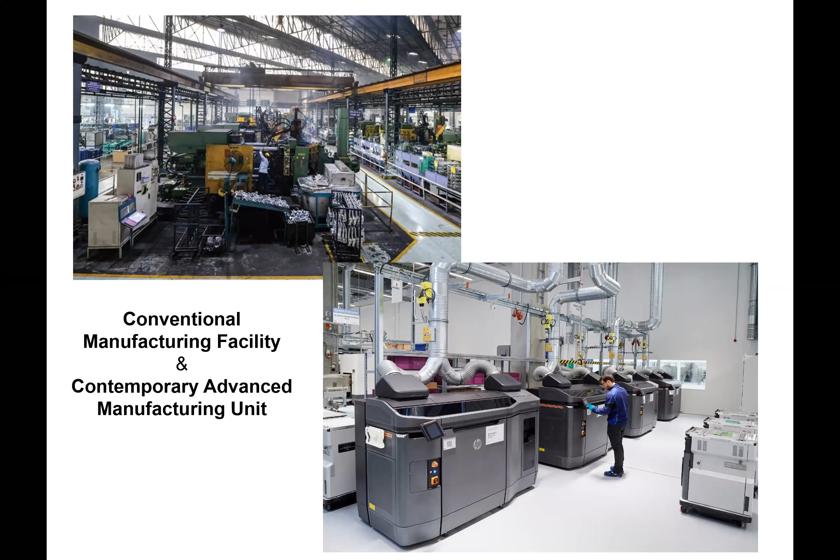And if you contrast the scenario prevalent in a conventional manufacturing setup, which I have shown on the top left, to what is being seen in this kind of instance, the changes are significant. The transformation is radical. So fundamentally, if you are talking about additive manufacturing, what happens in this case is the CAD data is converted into a physical model.

This is done layer by layer, by adding the material without any human intervention. Contrast this with conventional manufacturing, schematically shown on the top left, where you have to make use of tools, keep removing material depending upon the part geometry. The process may change, and the fixturing plan may change, and throughout the process you are generating significant amounts of waste. There may be manual intervention in some cases, depending upon the necessity to use tooling, fixturing, and inspection, which could be intermediate inspection or final inspection.

So contrary to that, in case of additive manufacturing, you are adding the material, and the process remains unaffected even if the geometry is extremely intricate. The systems can run continuously without any manual intervention. And last but not the least, the kind of materials getting integrated into 3D printing systems are continuously on the rise.

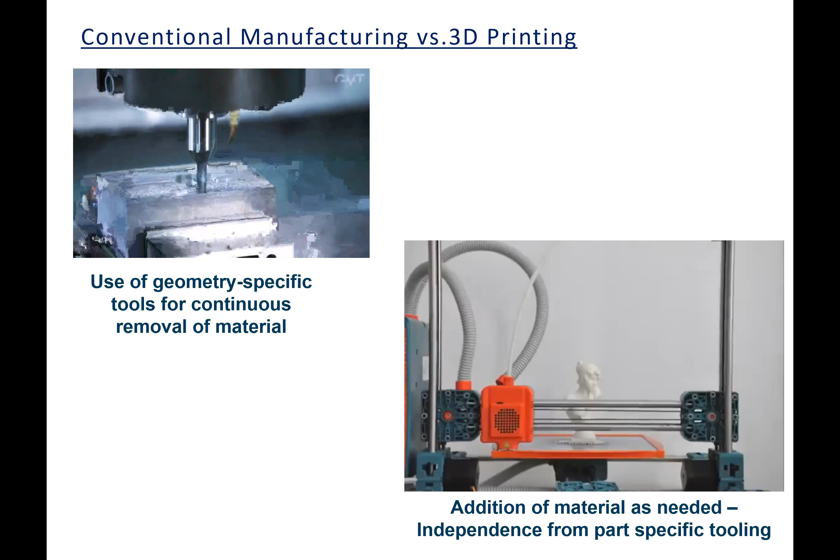So in this kind of scenario, what do you see as the connectivity between IoT, 3D printing, and other important digital technologies like data analytics, mobile internet, and cloud technology?

About 6 or 7 years ago, the world famous thought leader McKinsey identified technologies which have got the ability to disrupt the way businesses are conducted, the way our day-to-day things are transacted. As you can see here, there is a big list of very impressive technologies, and you can already feel the impact of mobile internet, robotics, renewable energy, and cloud technology in the way we are producing, in the way we are inspecting, and in the way we are supplying various products to points of care.

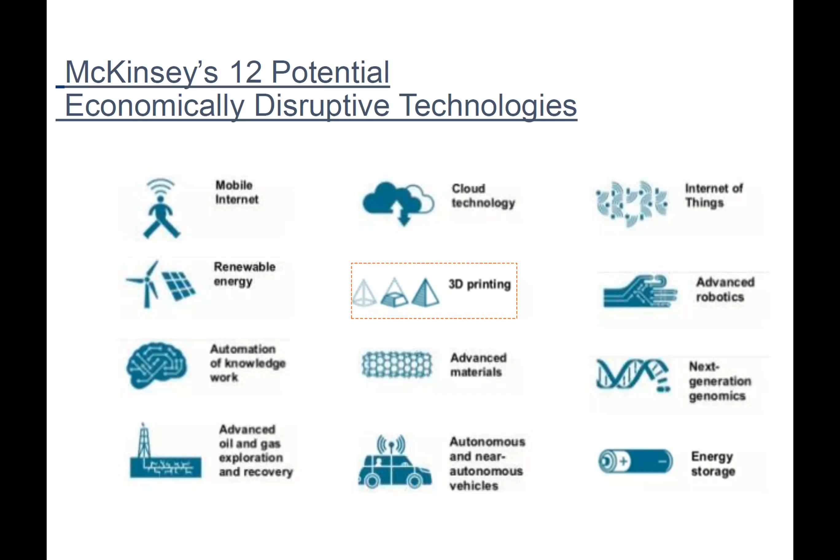So 3D printing is put in a similar kind of league, and it is expected, and we have started even experiencing, that 3D printing as a technology in tandem with other digital technologies is going to have a tremendous influence on businesses. So when we talk about 3D printing, we are just talking about a concept.

It's not a specific machine, it's a concept of converting CAD data into physical models without usage of any tools. Some work based on the laser curing of photopolymer materials, as shown in A. Some technologies work on the principle of extruding a plastic material through a small nozzle, as shown in D. It is called FDM 3D printer.

This is what is generally seen in many colleges, which convert plastic filament into physical parts. And you have also got other kinds of technologies wherein you can project the entire information onto the screen at a single time, and instead of discrete movement of the laser beam, you are curing the entire layer to get a physical object.

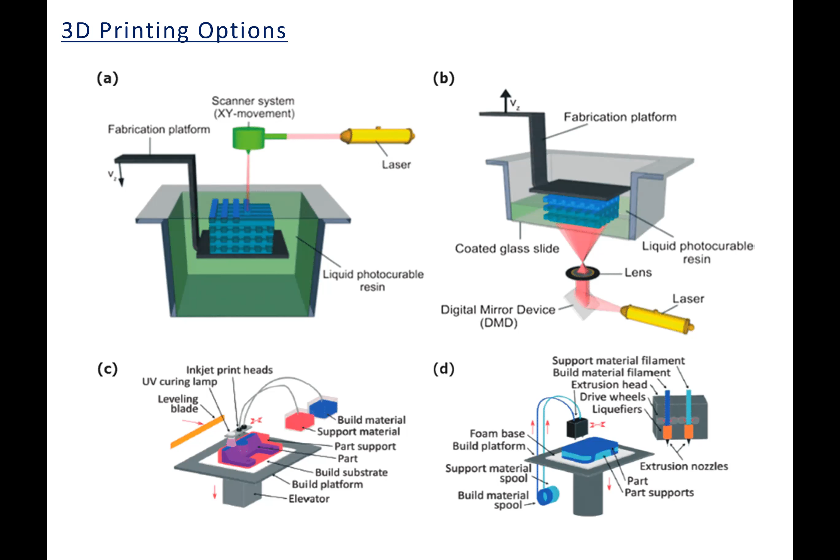So they come by different names. Some are known as stereolithography, fused deposition modeling, selective laser sintering, laser powder bed fusion, electron beam melting, binder jetting, material jetting, and the other technology is called laminated object manufacturing or layered manufacturing.

What is important for you to note down now is this technology has tremendous ramifications across sectors. I will show some case studies. You will realize how this technology has made significant inroads in India, starting from aeronautics to defense to space research to consumer goods manufacturing to health to transportation, oil and gas, etc.

I would like to pick up the examples corresponding to the medical industry in particular. There are many orthodontists who are working, including in places like Calicut, Cochin, Hyderabad, Bangalore, Chennai, etc., wherein in case you connect with them for orthodontic treatment, there is no necessity to use metallic braces for correcting your teeth. They take an impression from your tooth, upload it into the cloud, and somebody who is remotely connected creates 3D printed aligners based on the data which has been shared by the doctor.

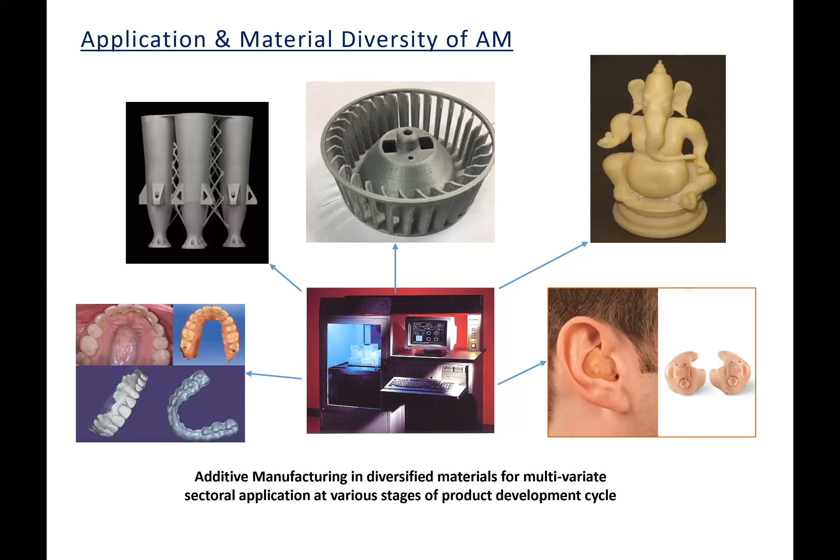So in all these things, what is very important is there is a tremendous usage of sensors, optical sensors, proximity sensors. There is a big usage of CAD modeling, 3D scanning, and most importantly, the methodology by which the entire process is becoming toolless.

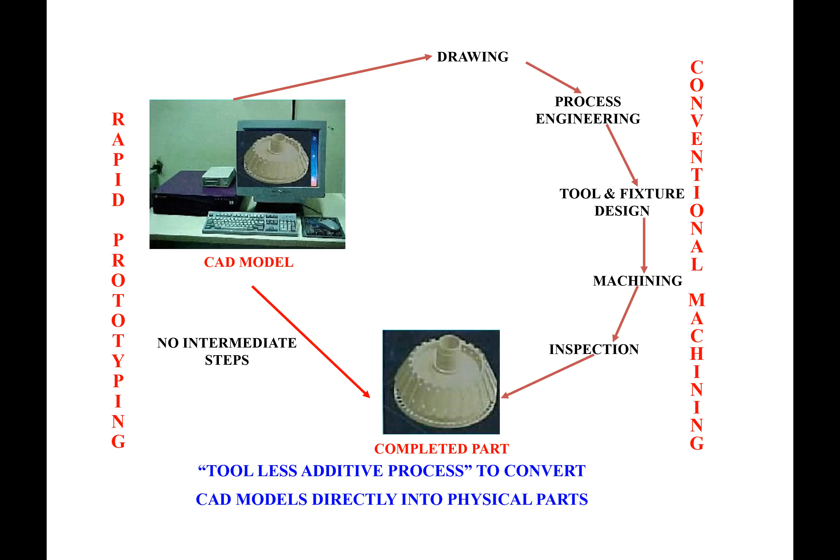So if you see in this slide, what is indicated here is in case of conventional manufacturing, you start off with a drawing, you need to develop the process, you need to develop the tooling and machine it, and finally you get the part of your choice. But in case you were to use 3D printing, in one step, you are able to transform the digital data into a physical prototype without any intermediate requirements connected with the tooling.

Now, what is important is in the olden days, this technology came into existence in the late 80s or early 90s. In those years, most of the initial set of applications were largely confined to prototyping. It means the user groups were interested in giving a shape to the design. They were not really interested in putting the part into use. But in recent times, we have seen that 3D printed parts are put into real-time use, real-world use. So I have given two examples, a very simple example and the most complex example.

What you see in the bottom left is a nasopharyngeal swab. When COVID struck the world in a definitive way in March 2020, the number of companies which were capable of making swabs was very limited. And testing was one of the most vital things in terms of finding out the incidence and controlling the spread of COVID. Quickly, the 3D printing companies came forward in terms of producing these nasopharyngeal swabs using tabletop systems and delivering them at the point of care. That is one end of the spectrum.

The other end of the spectrum is on the right side, where rocket engines, casings, rocket engine housings are made using 3D printing out of Inconel alloys, which are extremely high temperature resistant, and they have been successfully certified for space launch for the usage of the company called SpaceX, started by great innovator Elon Musk.

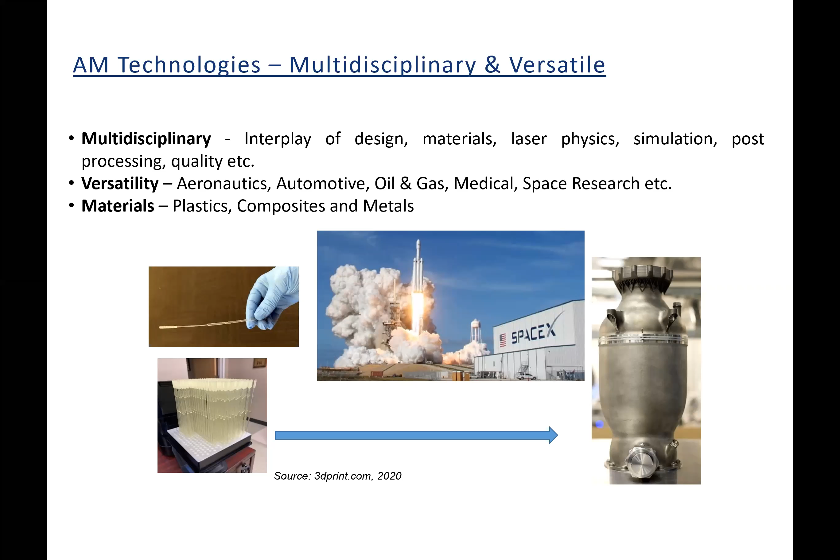So in this case, what happens as far as the integration of IoT is concerned? When you use 3D printers, you are definitely interested to find out whether the machine is running or not, whether there is any downtime, whether the system is developing excessive vibration, any hotspots, and whether you need to change the filament depending on consumption for a particular part. So if you're interested in remote monitoring and operations of 3D printers, you need to embed sensors and monitoring mechanisms, and you can realize the functional advantages of remote monitoring through IoT.

Now come to the other important possibility. When the system is running, you are always anxious to find out whether the machine is running as expected, and whether there are any problems likely to arise. So you are interested in predictive maintenance protocols, and you would like to introduce systems which are smart with reference to asset management.

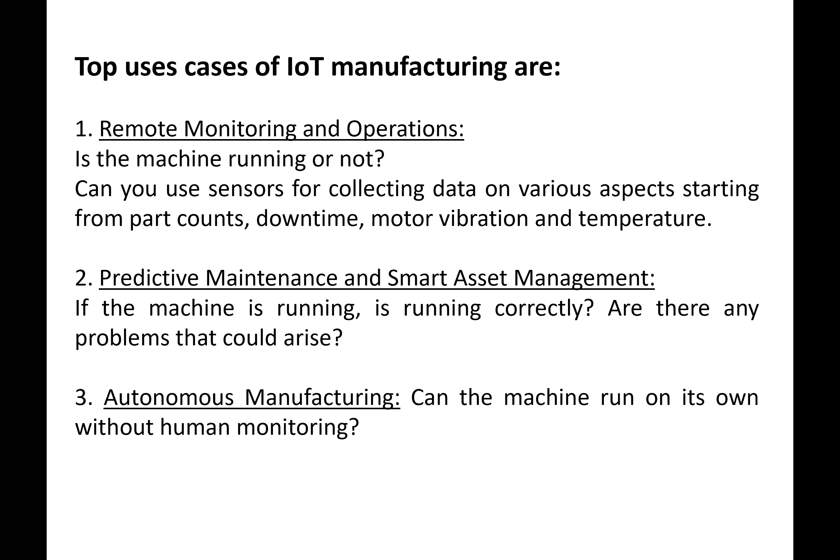And the final and futuristic step, which you may not see now but is likely to happen in the future, is autonomous manufacturing. Can the machines run on their own without any human intervention? As soon as the feedstock is consumed, can the machine seek material from the repository or inventory and start the operation on its own? This is a kind of autonomy which you are looking forward to, and IoT practices are very important here.

Our plant is in Bangalore, and in 7 years since inception, we have served projects in space, including ISRO, VSSC, LPSC, defense labs including many DRDO labs, HAL, BEL, etc., aeronautical companies including Airbus, Boeing, Honeywell, many automotive companies, healthcare companies, industrial and tooling companies, and oil and gas companies.

So I'll give some examples from this plethora of options in terms of how IoT integration into additive manufacturing is able to accelerate entire product design and development cycles, with the necessary improvement on quality, productivity, and reliability.

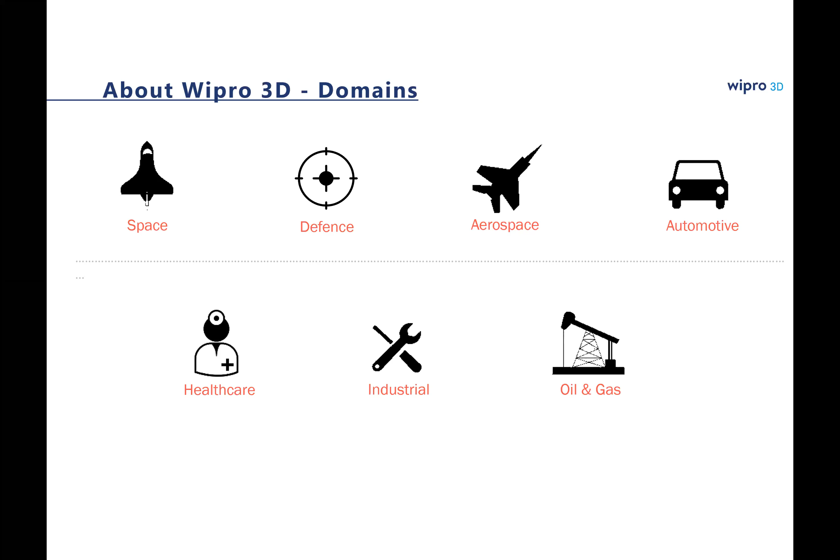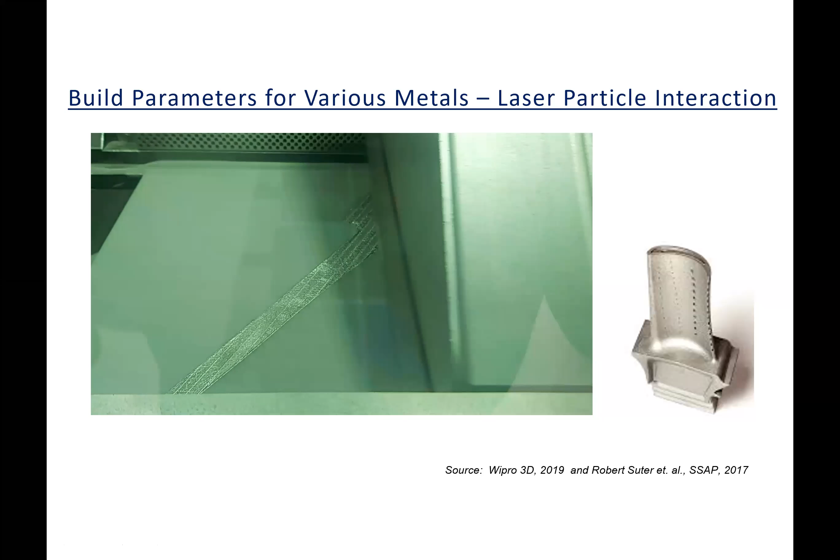In laser powder bed fusion, we are scanning with the help of a laser beam on the surface of thin layers of metallic powders. When the laser beam gets in contact with these metallic powders, the heat transfer happens at rates in excess of 5000 Kelvin per second. There is instantaneous melting of the particles followed by solidification, because the heat gets transferred to the build platform.

And without use of any tools or fixtures, you are able to make parts out of metallic materials like aluminum alloys, titanium alloys, inconel alloys, and many steels, including maraging steels and stainless steels like SS316, 17-4, and 15-5, etc. So what is being shown now is the laser powder bed fusion of a turbine blade which has got a fir tree root. You can see after the layer is made, the platform is brought down by an extent equivalent to the layer thickness, and the process continues.

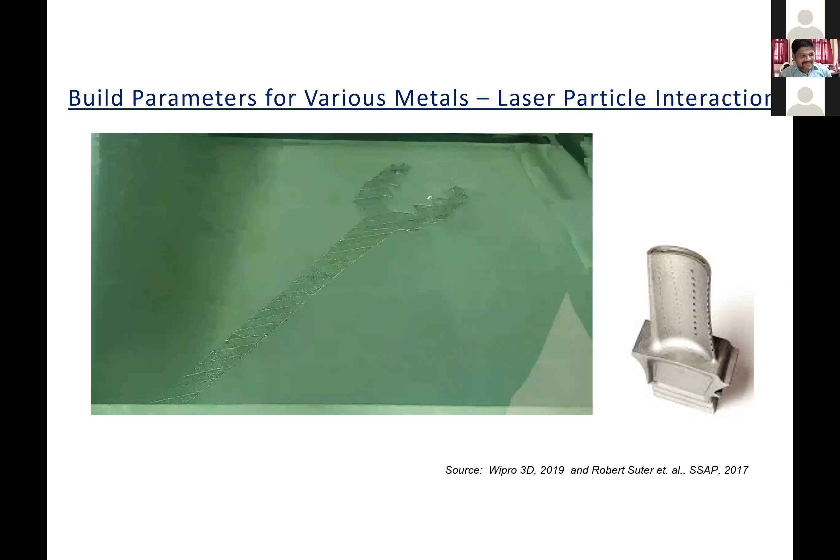Interestingly, this particular technology was born in engineering campuses. The first ever selective laser sintering system was developed by an undergraduate student called Carl Deckard while he was pursuing his undergraduate degree at the University of Texas at Austin, way back in 1987. He was fascinated with this technology and continued to work with it through his master's and PhD. Currently, the additive manufacturing business is worth about 12 billion US dollars across the world.

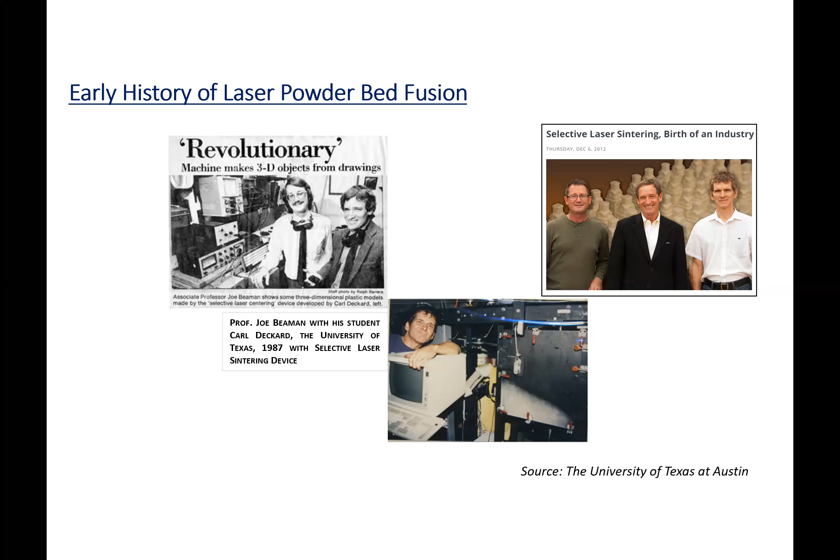Now, what are the products that we have been able to make, and in which materials and sectors? You can see here, we have made parts for propulsion nozzle discs out of nickel-based superalloys called IN718. You can see many sensor housings. What you see in the center is an orthomode transducer, a microwave component also called a polarization duplexer.

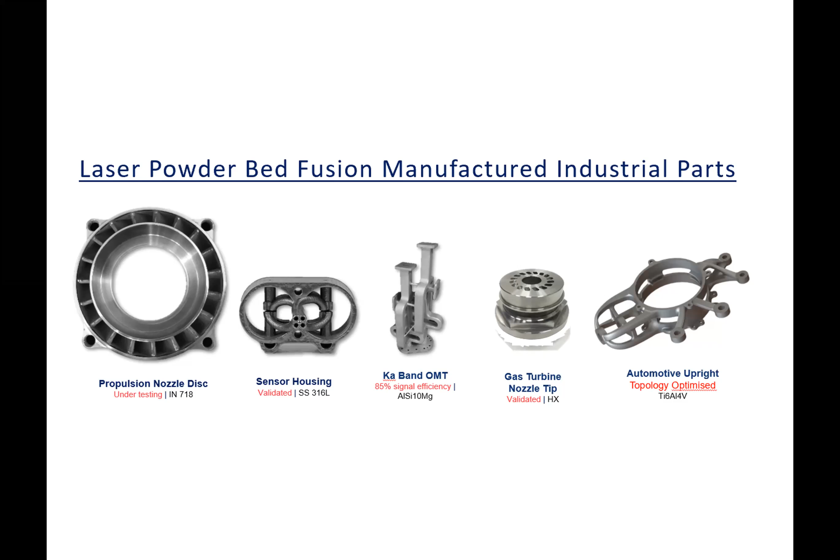The largest part we have realized is more than 1.2 meters in diameter, shown on the left extreme. It is called an anti-ice assembly. Its functionality: it is fitted to a gas turbine engine which propels a combat aircraft, especially when the aircraft is operating in extremely cold zones like Kashmir or Leh Ladakh.

There is a possibility of ice formation right in the frontal portion of the gas turbine engine. So this anti-icing attachment picks up hot gases from the turbine modules to make sure the icing is prevented without any repercussions on the thrust levels of the gas turbine engine.

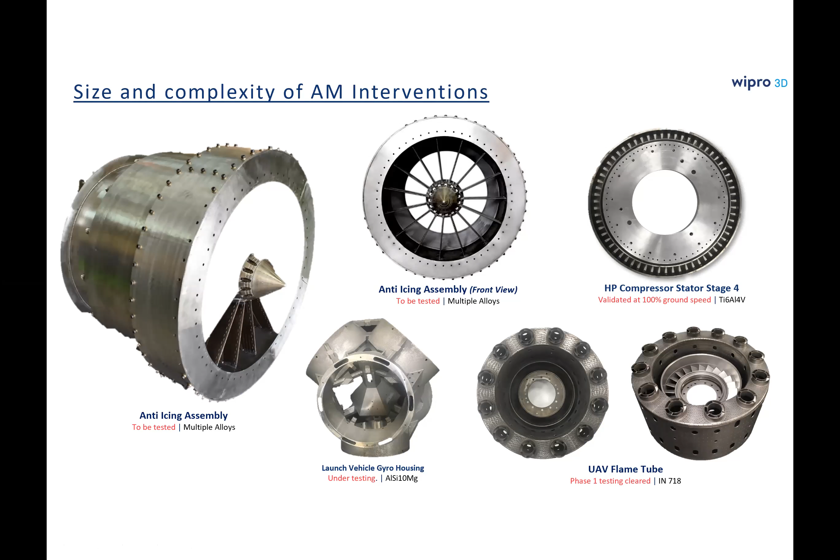I'm talking about a component called a flame tube, or combustor housing, shown at the bottom. It takes about 4 days for the part to be made on a powder bed fusion system, a 3D printer which works with nickel superalloys. By the way, if the same part were made using conventional manufacturing, it takes about 6 months. We are able to compress the time frames from 6 months to a week.

In the olden days, the entire maintenance protocol was completely different. It used to be reactive. What do you mean by reactive? You keep working on a system and continue to work on it till it fails. When it fails, you start looking into the operation and maybe you need to change some parts or modules, or service them. Definitely there is a breakdown time, and the entire philosophy of maintenance was based on the equipment alone.

Afterwards, technology moved towards a trend called condition based monitoring. It means you are not only dependent on the equipment, you started using sensors, and also looking at the processes. Because of this, you are able to take cognitive steps in terms of predictive maintenance.

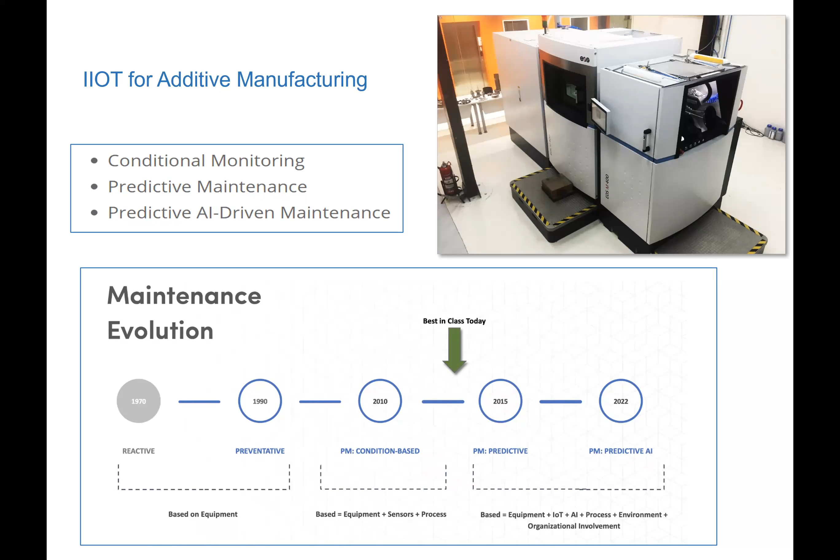In the future, we are going to depend on a synergistic combination of equipment, IoT practices, artificial intelligence, and data generated continuously by monitoring the processes, leading to a predictive, AI-driven maintenance protocol. So we are moving from an absolutely reactive mode to a completely proactive mode and then to a predictive mode, enabled by the introduction of industrial IoT practices into manufacturing.

We at our own place have demonstrated this concept with a simple example of how you can do IoT enablement with a Delta 3D printer. The entire experiment can be completed in about 2 weeks, and the expenditure involved is also very, very low. For example, if you are making a part out of thermoplastic material using a 3D printer where three robotic arms work in tandem for realization of the part, there will be accelerations to monitor.

The point you are interested in is measuring the temperature on the print bed. And last but not least, you're also looking at whether filament is in sufficient supply or not. So we could put sensors corresponding to sensing the acceleration - an accelerometer, a thermocouple, or a contactless IR temperature sensor.

We can have PLCs connect to your gateway, connect to your PC, and do the necessary dashboarding to understand whether the process is happening exactly on par with expectations, in terms of avoiding excessive extrusion, non-availability of material, alignment of the layers, etc. This is a very simple demonstration of how you can use IoT technology for monitoring a manufacturing process, and it is very doable.

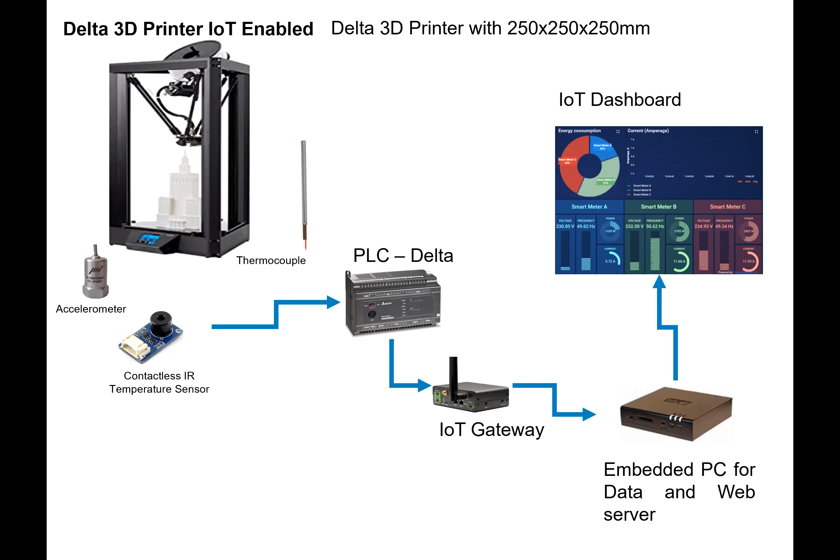Now, when you come to more complex systems like powder bed fusion systems, what factors need to be controlled? It could be connected with the laser - how the laser beam moves on the powder, what is the velocity with which it is moving, what is the distance between two hatch lines, how thick is the layer. And if you look at something called the melt pool, it is actually a very dynamic phenomenon, and it basically depends on the interplay of inertial forces, gradients in the surface tension, and capillary forces.

Incidentally, the heat transfer, as I briefly mentioned, is happening at very high rates in the range of 10 to the power 5 to 10 to the power of 6. And last but not the least, the pattern of heat transfer is not conduction as we generally think, it is more of convection.

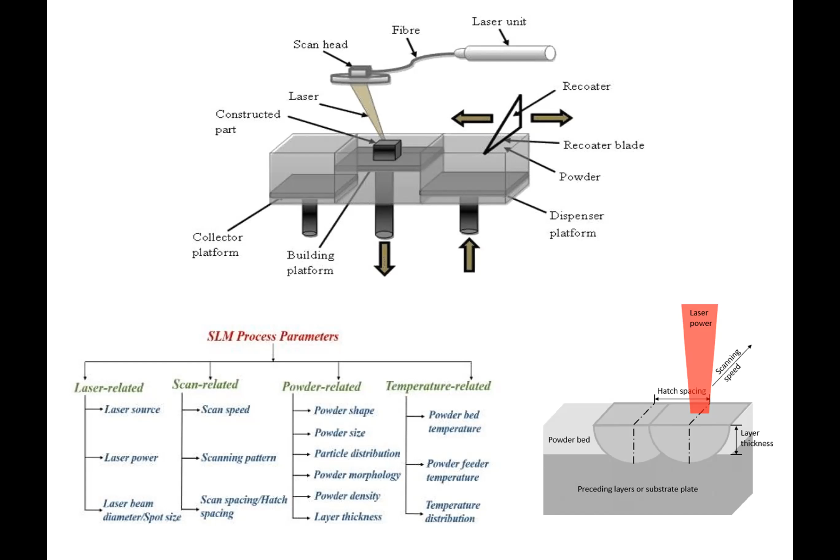So if you want to do IoT enablement of this kind of a process, you can see that the current generation systems have started embedding gas sensors, cameras, and they are getting the data slice by slice. Imagine that there is some subsurface porosity far above what you originally expected, or imagine a support structure that delaminated because of the recoater movement with a thin cross section module.

So all these things can be predicted by integrating these sensors, by integrating IoT practices into next generation rapid prototyping systems. It's important to understand that the part which comes out of a 3D printer is a function of the interplay among the process, properties of the metal powder, and the microstructure, which you are really interested in evaluating at the necessary points, because when you are able to control the interaction among process, structure, and property, the performance of the part will be on par with your expectations.

For example, what is shown in this case is a high pressure turbine rotor blade. It has to operate at temperatures in excess of 1000 degrees centigrade. RPMs will be more than 17 to 18,000 RPM. The pressure levels are 20 times more than that of atmospheric pressure. And in case this component fails, the entire aircraft's operation could be rendered catastrophic.

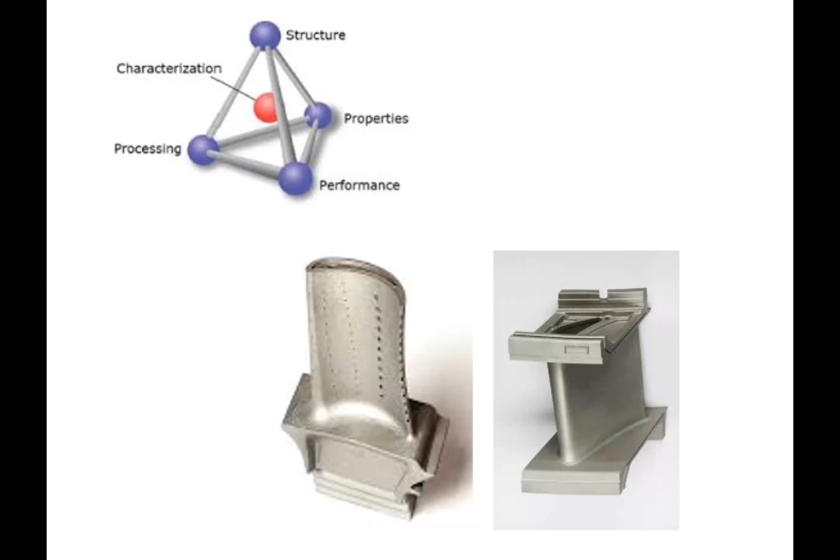So you can see the power of monitoring the performance and ensuring reliability through IoT in a much bigger manner. So the other concept which I have come across in terms of demonstrating the applicability of IoT is illustrated here in a schematic way. What is shown in this case is a Delta 3D printer. It is kept in the center on circular tracks.

You have got low cost cameras, and the camera is moving around the 3D printer as the operation is happening. And after the printing of each layer, the data is picked up and processed on the algorithms of convolutional neural networks. The entire effort is partially done on edge computers and partially done on the cloud. The idea is to predict the defects.

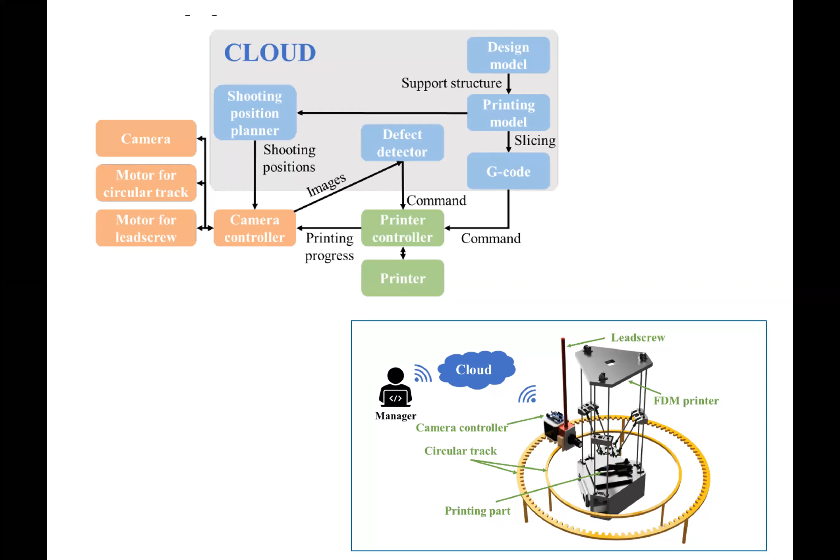The defect could be excessive polymer extrusion or insufficient polymer, hotspots on the build platform, delaminations, or misalignments. So this is a wonderful demonstration of how IoT enablement along with machine learning and machine vision algorithms can be done in terms of finding out the defects likely to emanate during the course of 3D printing with the polymer.

Before getting deeper into the subject of IoT and manufacturing, let me spend some time describing what has been happening conventionally in manufacturing and where we are heading. In the early stages of industrial manufacturing, around 1900, when the company called Ford started assembling cars, the entire focus was only on increased production and reducing the labor cost. During the 1960s, Toyota came into existence in terms of world-class manufacturing interventions, where they talked about reducing defects, reducing waste, making the entire process lean.

The 80s were more about introducing flexibility in manufacturing. How can you increase the variety of parts? And how can you reduce the inventories without affecting the productivity? But slowly they gave way to IoT enabled manufacturing practices because of significant usage of sensors and a huge improvement in terms of computational capabilities.

And because of this embedding of sensors and IoT practices into manufacturing systems, some phenomena like improved resource reuse, machine to machine interfacing, ubiquitous computing, and elasticity in terms of improving responsiveness to customers' needs all happened. In fact, 3D printing is one of the manifestations of this phenomena.

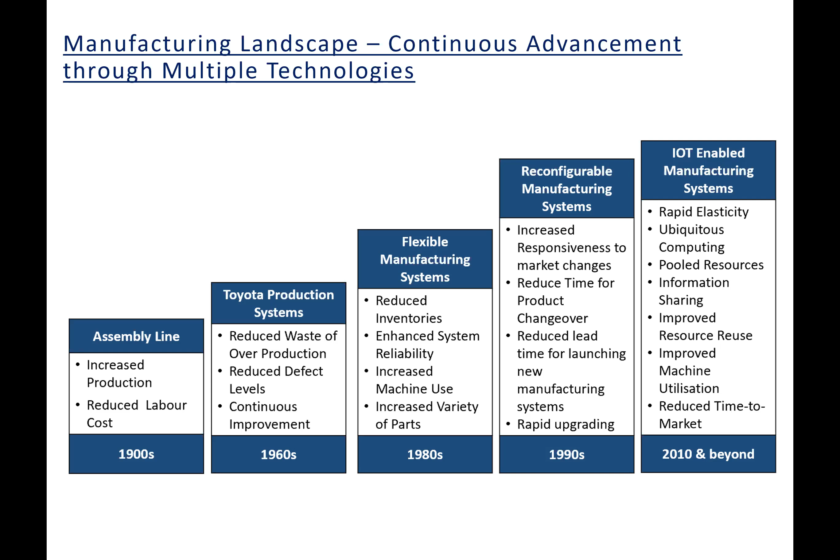The current state of the art application of IoT in manufacturing is not about asset tracking or quality control or predictive maintenance. These are some of the phenomena which have been well understood. Maybe about 2 to 3% of companies are already into that. There is a long way to go before we can say IoT is firmly entrenched in manufacturing. In a country like India, I may not be far from the truth if I say the penetration of IoT is less than 2 to 3%.

But what is the world's best in terms of leveraging this particular phenomena is a digital twin.

What is a digital twin? It's actually a virtual representation of a physical object, a process, or a system. So you could be talking about a digital twin of a gas turbine engine, a tunnel, or a combustor.

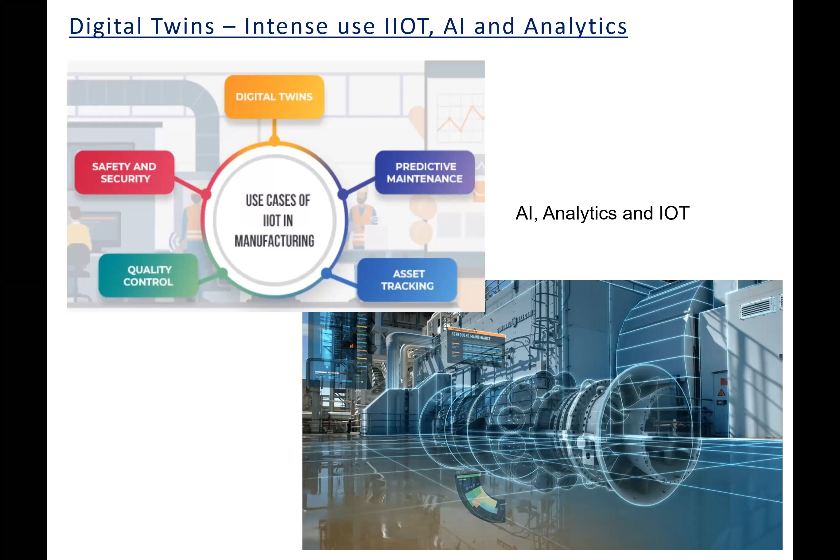But the key thing is this virtual representation is for the entire life cycle. The digital twin uses real-time data from various sensors and other sources to enable learning, reasoning, and dynamically recalibrating for improving decision making. So the digital twin is able to continuously learn, reason out, and recalibrate its response, and all this contributes to better decision making.

So you look at a complex system like a gas turbine engine. This technology has been championed by world-class companies like Siemens and GE for some years. When you introduce a digital twin, fundamentally you are visualizing complex products and systems in real time by disparate users. Any assumptions made with reference to performance get validated, and you're also able to predict the performance characteristics. Should there be any problem with a system, module, or subsystem, you can even do troubleshooting from a faraway location. This is one important manifestation of the combination of IoT practices, artificial intelligence, and data analytics in terms of improving quality and productivity of systems.

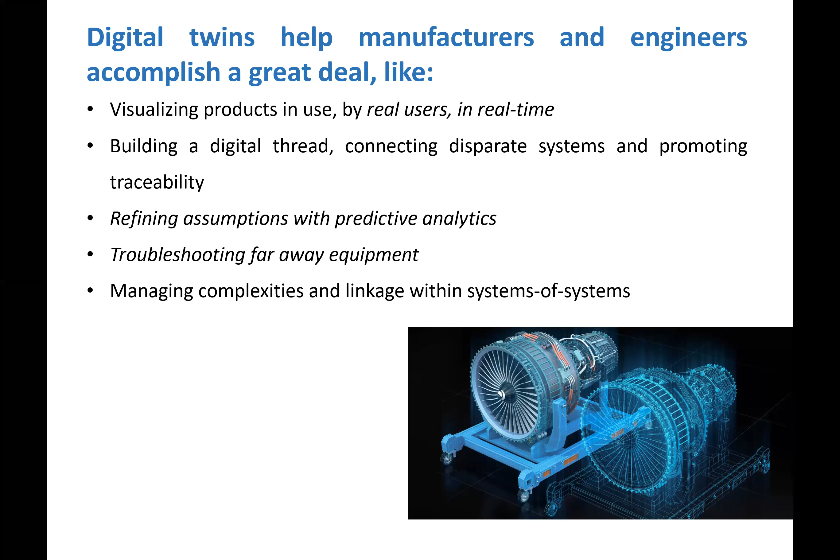Many automotive companies, including Bajaj, Mahindra, TVS, and Ashok Leyland, depend on tier 1 and tier 2 suppliers for making components and parts, and these suppliers are distributed across the country. In the olden days, tier 1 suppliers had to physically transport the finished goods to the OEM and wait for their quality control and inspection recommendations before they could get the necessary confidence in the quality of their throughput.

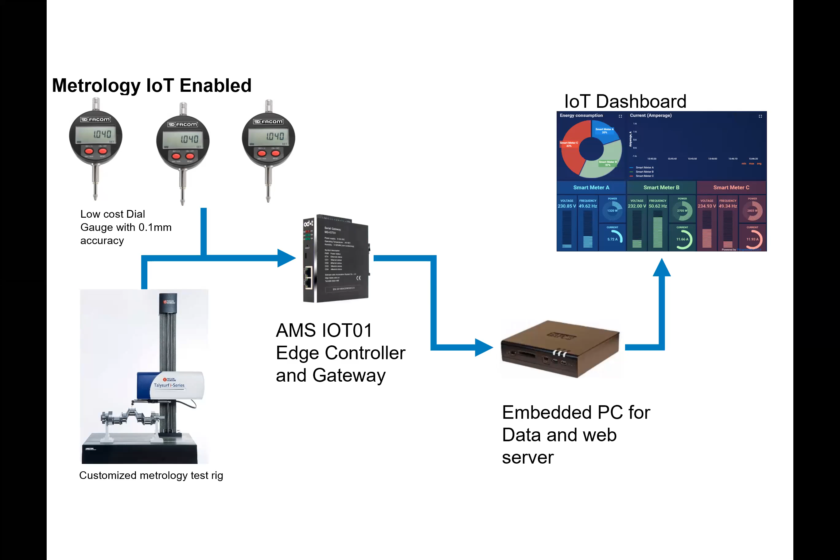But now, thanks to the all-pervading presence of IoT, the entire metrology or quality control process has undergone a tremendous metamorphosis, and you are able to take real-time decisions on whether the product can be accepted, rejected, or recommended for rework because of the introduction of sensors into the metrology.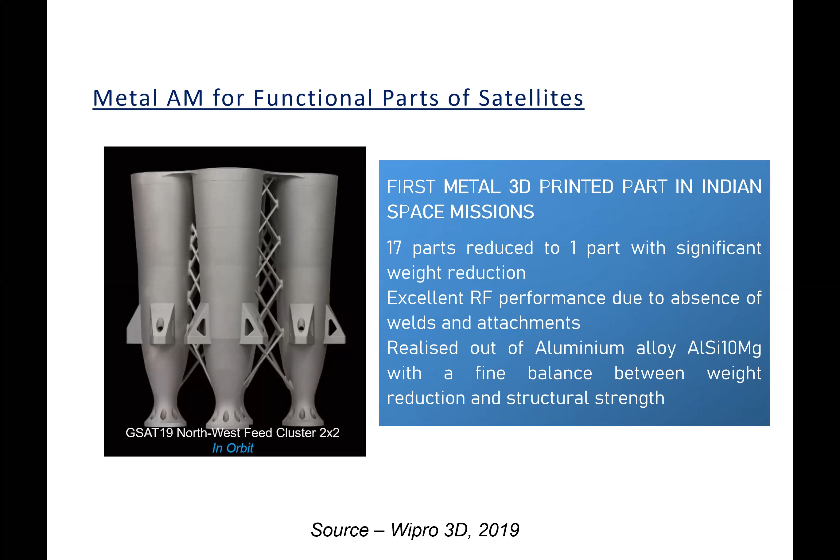What you see on the bottom left is from a Hyderabad-based startup called Skyroot, which is making rocket engines for launching small vehicles and small satellites. This component has been made out of a special purpose aluminum alloy called AlSi10Mg using laser powder bed fusion at Wipro 3D. All these functionalities connected with 3D printing and IoT are enabling small companies, large companies, and research centers to aim for higher performance characteristics while the part weight is being continuously reduced, and more importantly, several functionalities are getting integrated into existing parts.

Mr. Siddhant Pai, an MIT graduate and social entrepreneur in Pune, started a movement wherein rag pickers are enabled to segregate plastic into recyclable and other lots, and the plastic waste is cleaned. He developed a distributed manufacturing model wherein plastic is converted into pellets, then filaments, which in turn are used as feedstock material for 3D printing. In the bargain, rag pickers who were simply collecting and selling plastic waste have become mini entrepreneurs using distributed manufacturing models to produce feedstock for 3D printing. This is a wonderful model.

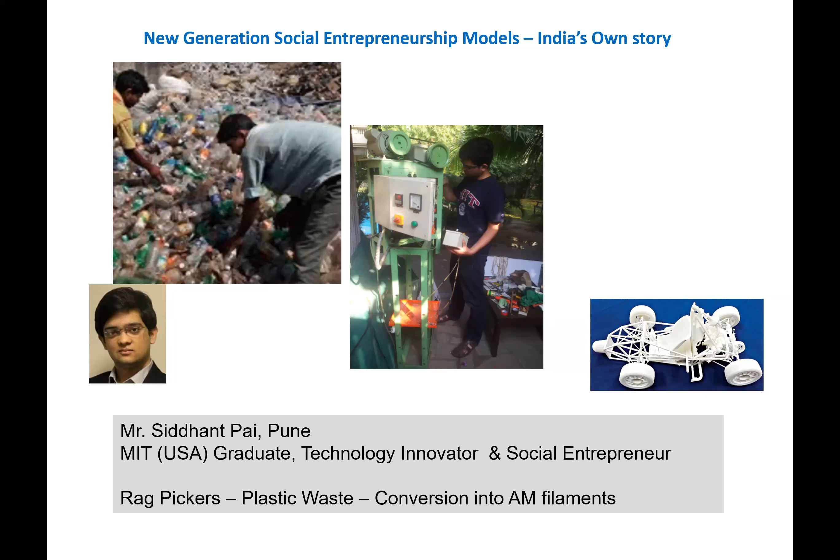Since March 2020, when there was a significant call from state and central government, I have personally seen that many companies, small, medium, and large scale, have started using these technologies in tandem with their regular practices in developing medical devices and ensuring they are delivered at the point of care.

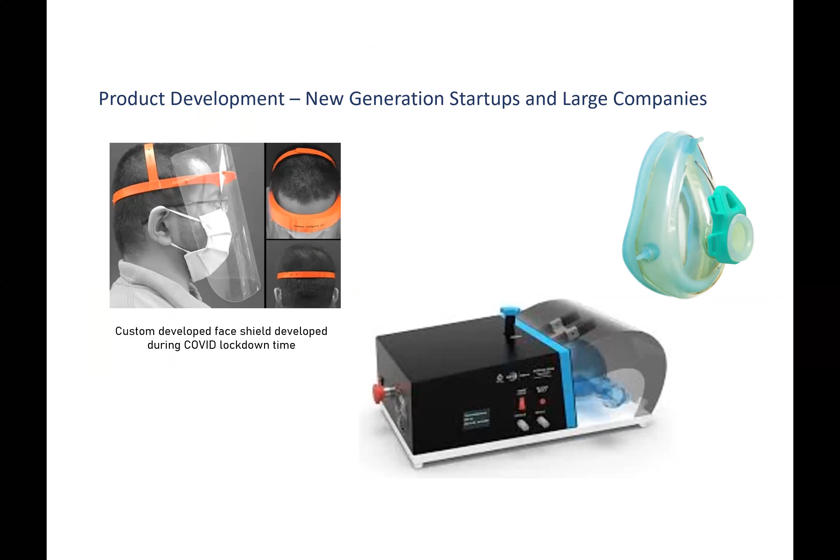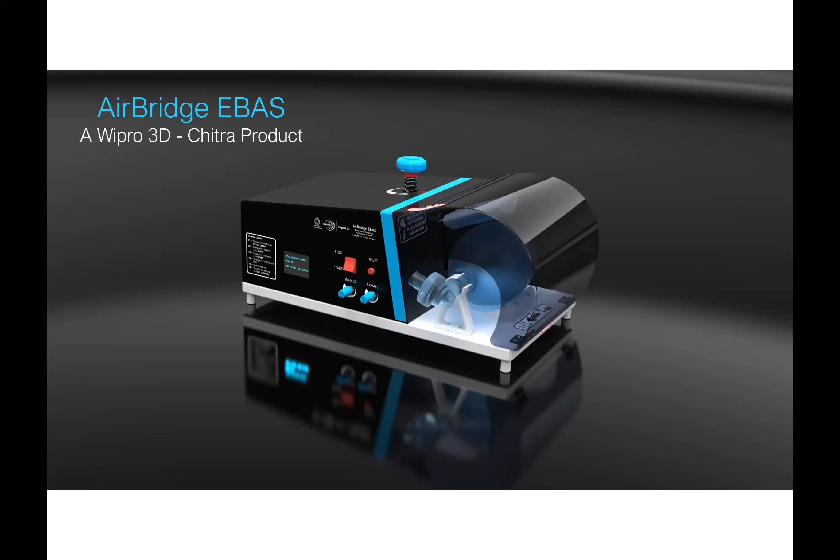What is shown in this slide is one result of the collaboration between Wipro 3D and Sri Chitra Tirunal Institute for Medical Sciences and Technology. We developed a transport ventilator, also called an emergency breathing assistive system, with the trade name AirBridge. The entire developmental cycle was completed between April 2020 and September 2020. Now the product is commercially launched and available at a fraction of the cost compared to foreign counterparts.

The beautiful thing about it is the extensive use of 3D printing, and now we are in the process of IoT enablement so the transport ventilator can be of significant use to intensivists and for telemonitoring when patients are being transported from villages and mofussil centers to metro cities. This is our own example of how product design and development, prototyping, manufacturing, commercialization, and operationalization have been tremendously influenced by digital technologies.

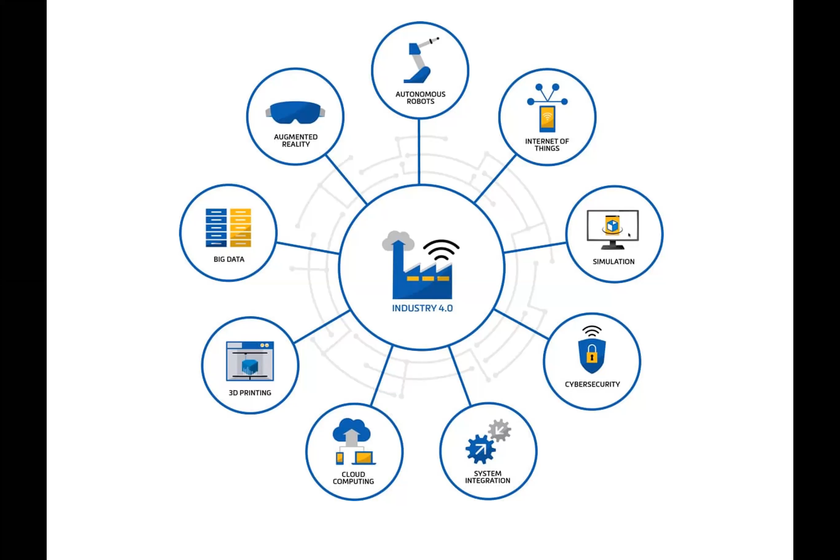Now the industrial ecosystem is moving towards synergistic usage of various technologies, starting from 3D printing to cloud computing, big data, AR and VR, autonomous robots, IoT, and cyber physical systems. Slowly but definitively we are impacting the entire process of product development through a symbiotic relation of all these technologies. With 3D printing specifically, we're talking about less wastage, no usage of tools, distributed models of manufacturing, almost a democratization of manufacturing, and greater design freedom.

Why we say greater design freedom is that in the conventional scenario, we had a phenomenon called design for manufacturing, DFM, meaning even if your design is good, if you can't manufacture it, you change the design. But in the current phenomenon, we talk about manufacturing for design. So designers have much bigger latitude to experiment with various concepts and come out with a configuration that best serves the purpose.

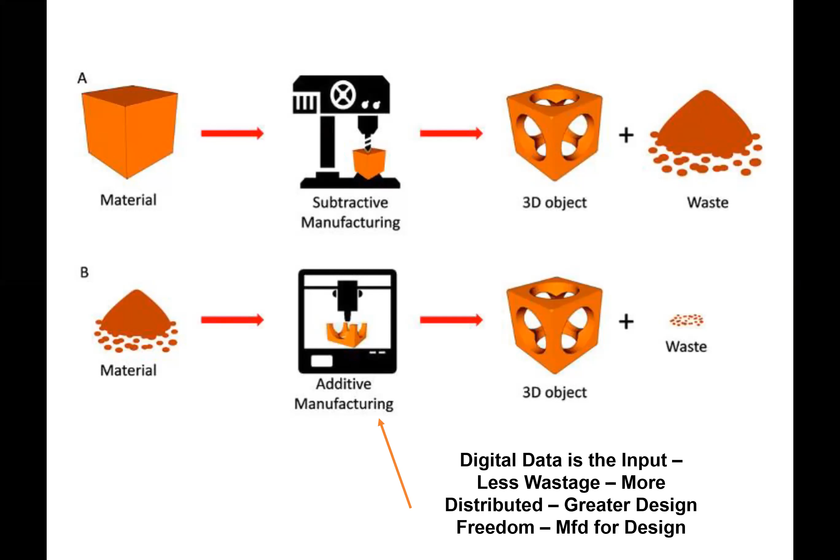In this kind of scenario, digital technologies are slowly but surely getting into the industrial context. This example is from a company called Betatype, wherein 300 plus qualified automotive headlight heatsinks have been made in a single bed using 3D printing, out of aluminum alloy. The build time has been reduced by more than 90%, and the cost per part is also significantly reduced. This is one manifestation of digitalization's introduction into product design and development.

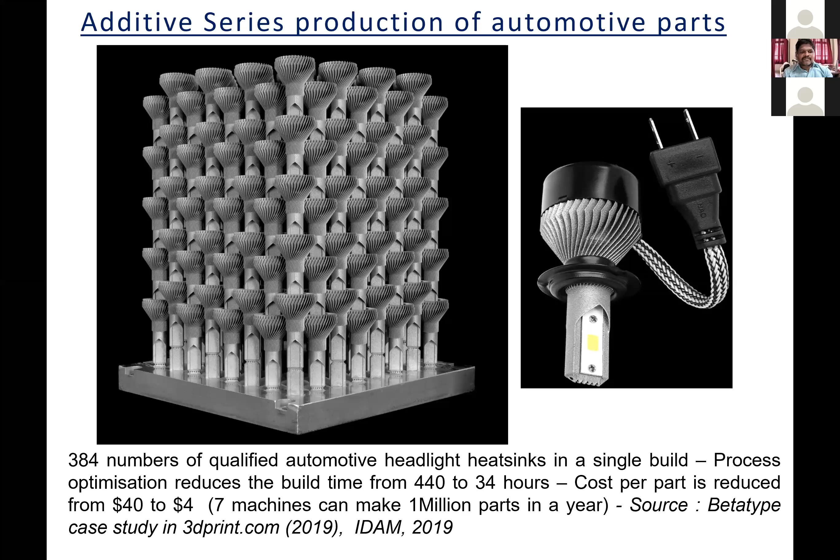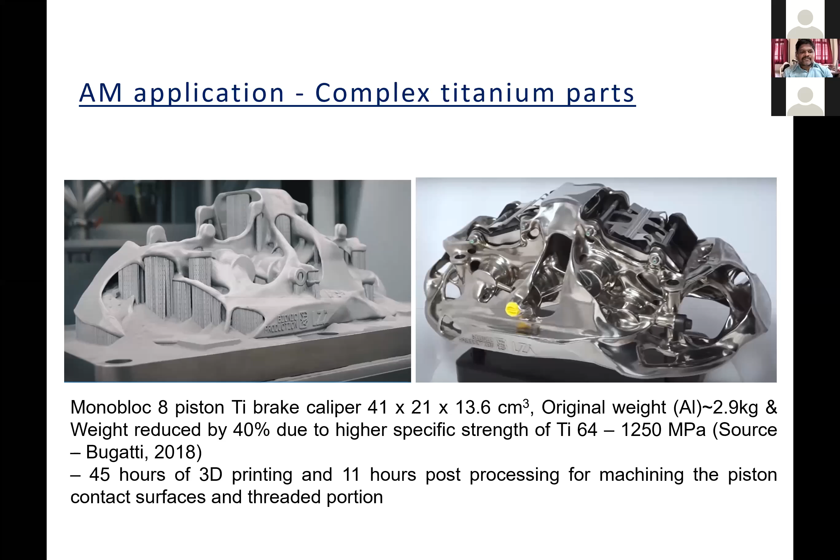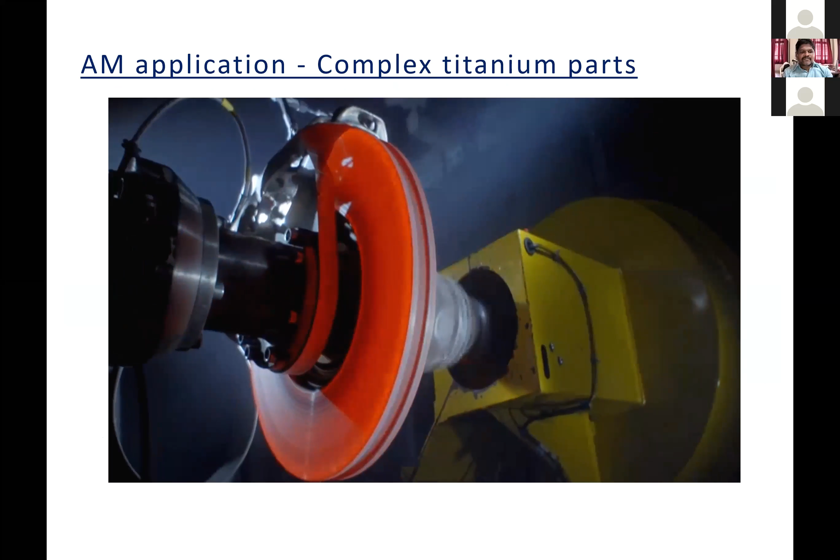The other example is equally fascinating. I've picked this from a company called Bugatti, a famous French company into design and development of premier cars. The part here is a monoblock, an 8-piston titanium brake caliper, approximately 40 centimeters in length. The original weight of 2.9 kgs has been reduced by 40%, and the entire processing time was sufficiently reduced. This product is subjected to high disk temperatures resulting from high speeds, and it's able to withstand the rigor of real world application.

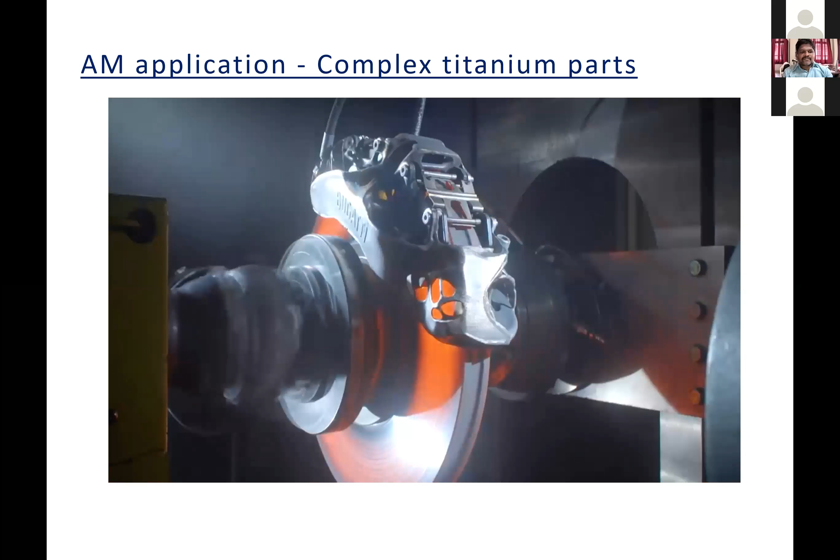So this is one very important symbolic representation. I have picked it up from the automotive company just to illustrate the point. It could be from any other industry also.

Most of the automotive companies, which have got supply chains spanning across the country, different states or different countries, they have been severely affected during the pandemic situations. The supply chains have been disrupted, and all these modules and systems are interconnected. In recent times, they have realized that to introduce resilience into these supply chains, it's a must that manufacturing models become as distributed as possible.

If you take our own Indian Air Force, it has got a fleet which has been traditionally procured from countries like France, UK, Russia, US, and all this fleet, the combat aircraft, the systems are maintained in 7-8 centers spread across the country. You imagine how many spare parts will be there to ensure the conditioning of this aircraft. It could be running into tens of thousands.

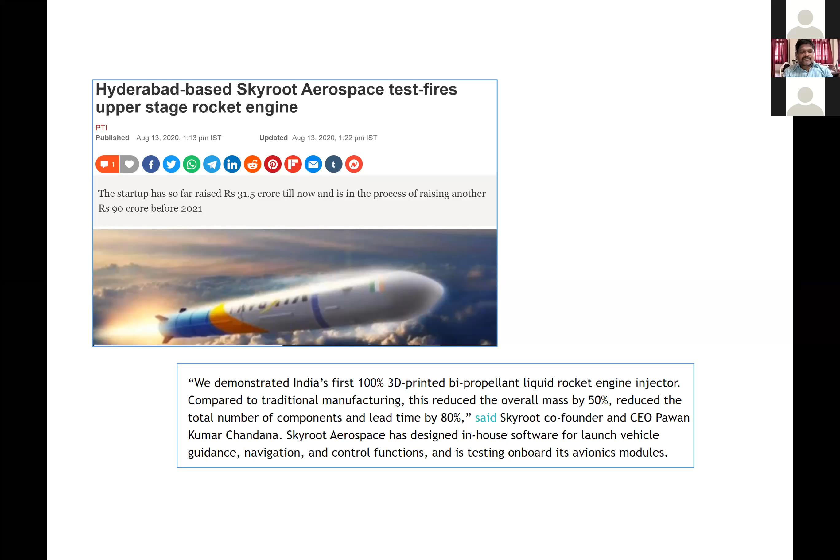But if you were to make use of sensors, if you were to take care of the maintenance in a very predictive way, the entire operations become extremely smart in terms of ensuring the availability of the part on demand, in time, and delivery at the point of care. That's why I see that in the future, the manufacturing processes, the spare part, the maintenance, the spare part supply, all these operations are going to be tremendously impacted because of the integrated use of various technologies into the functionalities.

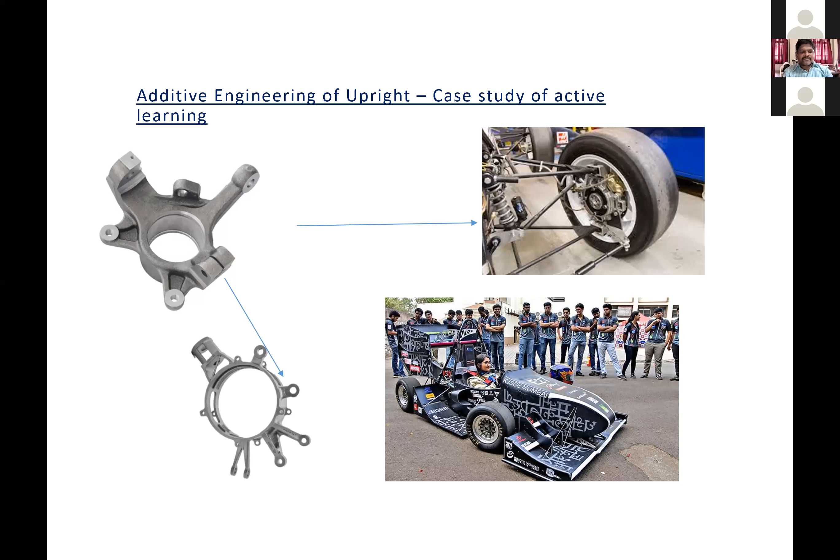If you are able to cut down the weight of this part, the cornering efficiency comes up tremendously, and last but not least, the stiffness also improves. So in this case, we put the component through, and the analysis was done capturing the design context. Optimization was done, significant weight reduction was experienced. Then we converted the topologically optimized design into the physical part, and then it was pushed into the test bed.

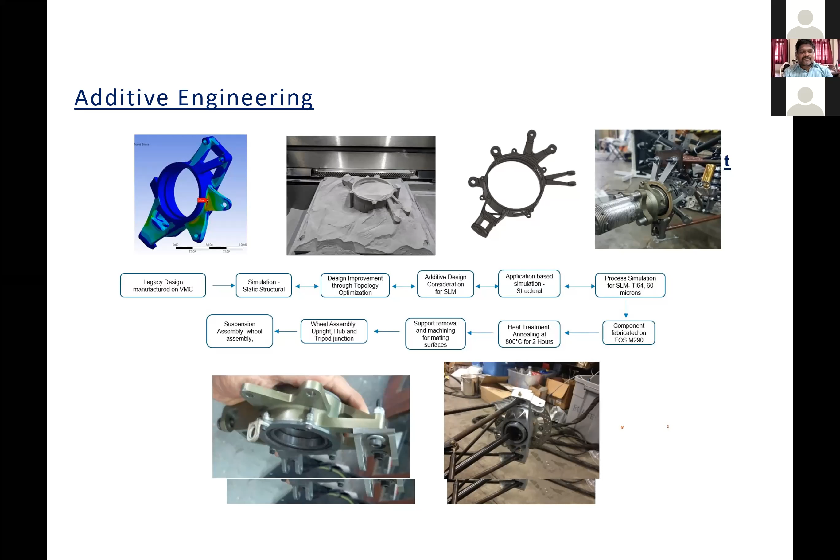And after getting the necessary confidence in the performance of this particular part, we were able to actually advise the students to go for introduction of this topology optimized part into the Formula Student car. There was usage of a tremendous amount of sensorization of the entire process monitoring, and enablement from beginning to end in such a way that the practice can become very smart.

So the integration of IoT with 3D printing is happening because of many reasons, including faster design iterations, introducing flexibility into the production, bringing in more resilience into the supply chain, and enabling customization, maintaining the parts in a very smart way, especially in case of obsolescence and legacy systems. So all these things are enabling.

And I just want to conclude my talk by saying that this is a very vast subject. I just want to give you a basic introduction to this technology today. Those of you who are interested in doing more and more work with us, you are welcome. I have many more examples to show, but respecting the time, I will not get into the examples.

Currently, we are collaborating with IIT Madras, IISc Bangalore, IIITDM Kanchipuram, BITS Pilani Goa campus, and so many other institutions with reference to doing projects in additive manufacturing, setting up 3D printing centers, setting up IoT centers, industrial IoT centers in the campus.

Should you be interested in any research and development connected with the calls of DRDO, ISRO, Respond, DST, or DBT, we are collaborating. We are also taking care of some training programs for faculty and students who are desirous of learning the industrial context of these technologies. And we have also collaborated with a couple of institutions in developing the technologies.

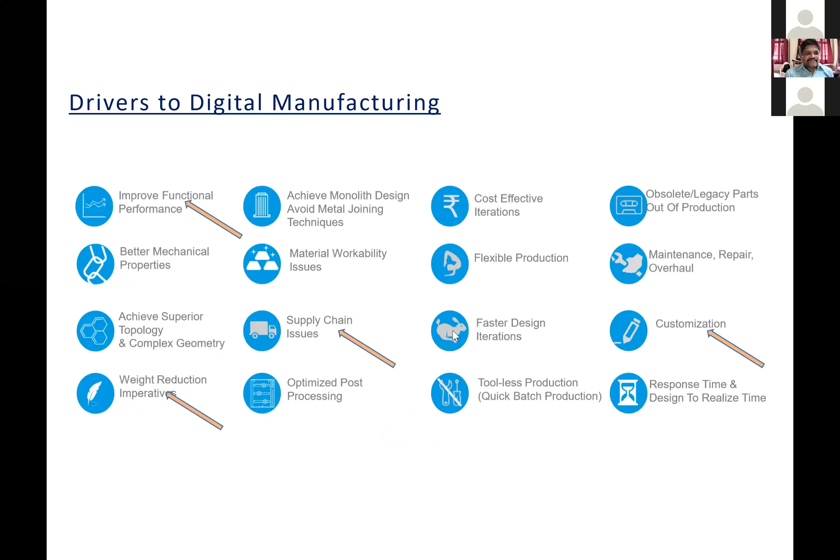I'm now going to present one very interesting case study which I did about 10 years ago. This is connected with development of a telemetry unit for a combat aircraft. I think some of you would know that in a combat aircraft, the propulsion is enabled by a gas turbine engine, which is shown in the bottom.

There are more than 20,000 parts in a gas turbine engine. Right in the frontal portion we have the fan unit. Next is the compressor, predominantly made out of titanium. Then we have a combustor where the compressed air is burnt along with the fuel. Then you have a turbine where energy is extracted, and then an exhaust module through which the combustion gases flow, creating the necessary thrust.

The frontal portion of the gas turbine engine is susceptible to foreign body impact and bird impact. Cracks could emanate because of low cycle fatigue phenomena. In the combustor, temperatures at which gases are burnt could exceed 2000 Kelvin, so failures connected with creep may develop. In the turbine, there are tremendous centrifugal loads and thermal loads, and there could be stress corrosion cracking.

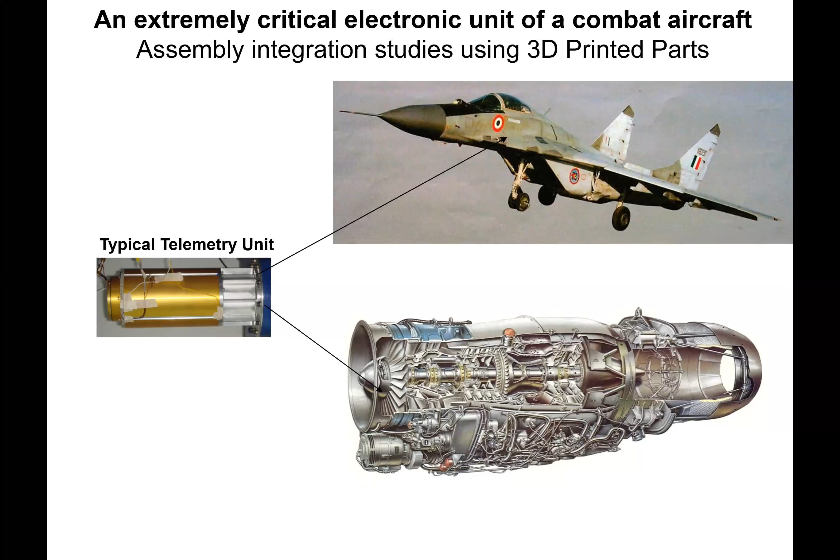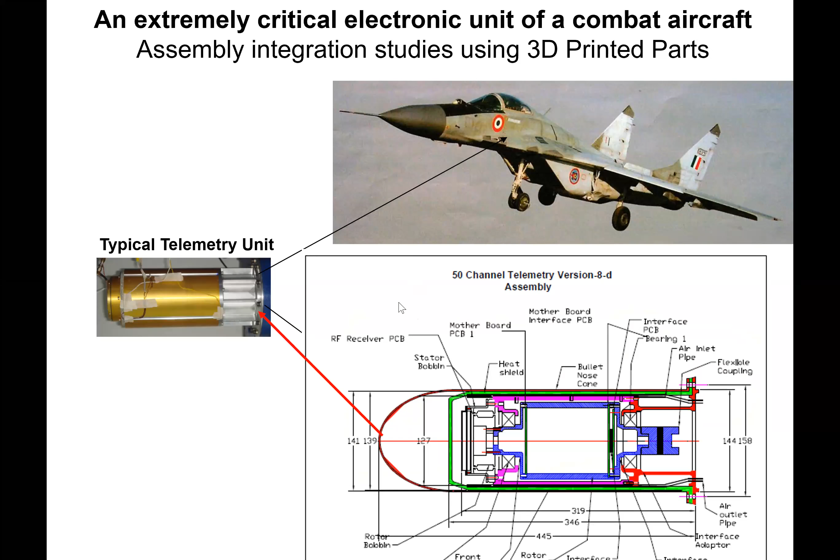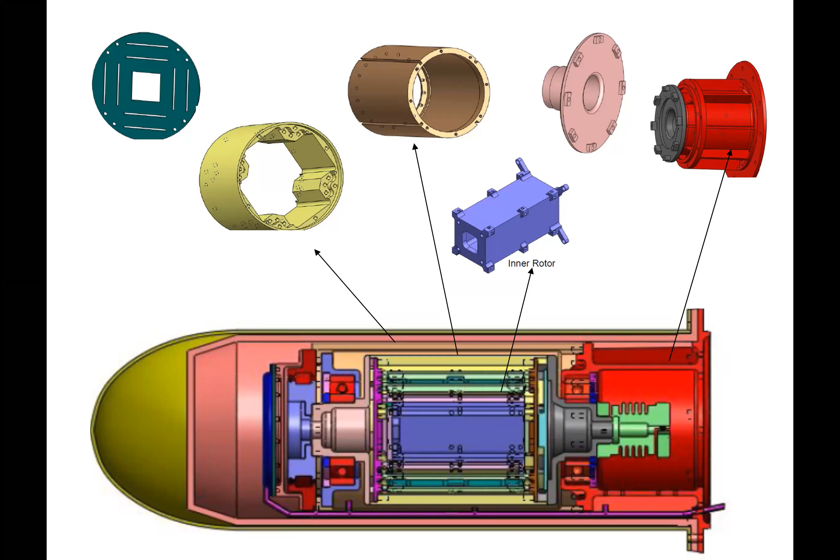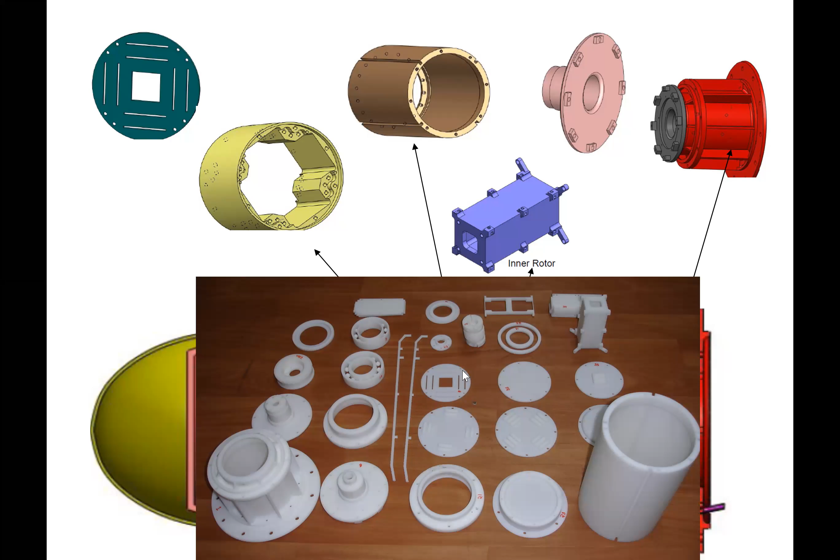So we had to go for a big prototyping exercise, converting each and every component into a full-scale 3D printed replica. All components are replicated, including the cooling pipes, and assembled. The entire assembly was checked for its cooling performance as well as sufficiency of the cooling air. We also integrated a lot of customized PCB configurations to understand whether there is any hotspot, any fouling, and whether the entire packaging can be done such that the reliability of the component is not compromised in any way.

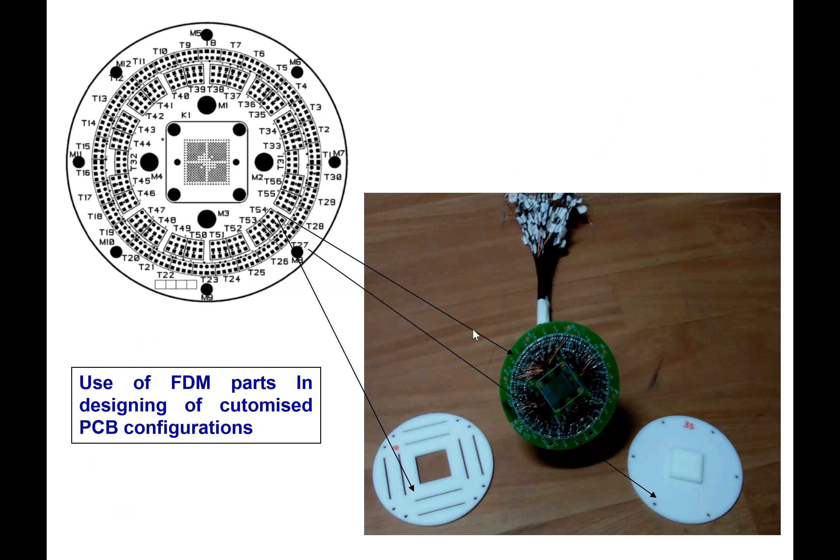One interesting thing which happened in this case is we introduced one strain gauged simulator, and tested it at about 2000 RPM, trying to understand signal noise ratios and identify the points of stress concentration, and trying to identify whether we are able to predict the performance prior to committing our effort to the machine. If you really see, the design and development of this telemetry unit has taken significant time and effort despite the availability of 3D printing in terms of physical prototyping, assembling and testing.

Now, because of this IoT enablement and the possibility of digital twin, you can recreate components, virtual representations of these physical objects across the complete operational cycle. So you can create a virtual representation, and you can be getting the data in real time from the sensors mounted on the actual component and also other sources. And you can learn, reason out, and dynamically recalibrate the entire component in such a way that you can take decisions regarding the performance reliability of the telemetry unit.

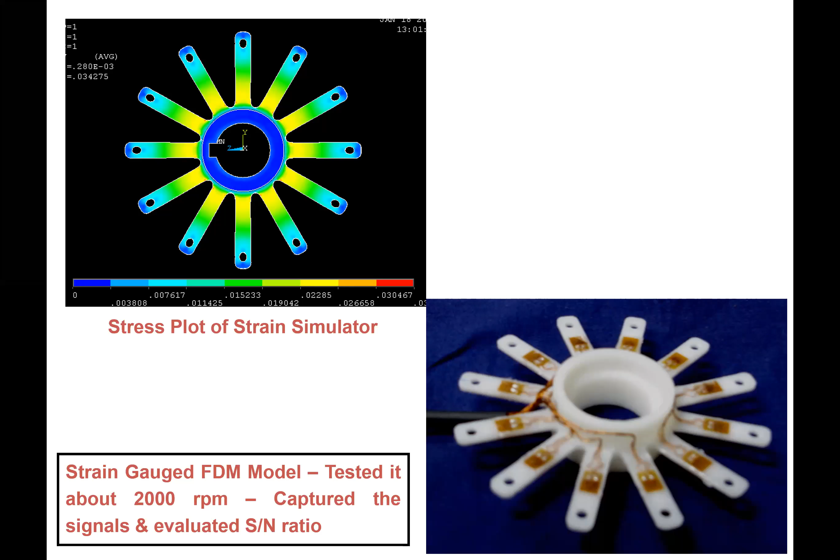So this is one outstanding example wherein you can easily visualize the impact of industrial IoT practices corresponding to complex systems, and how they manifest in terms of improving the reliability of this component and module.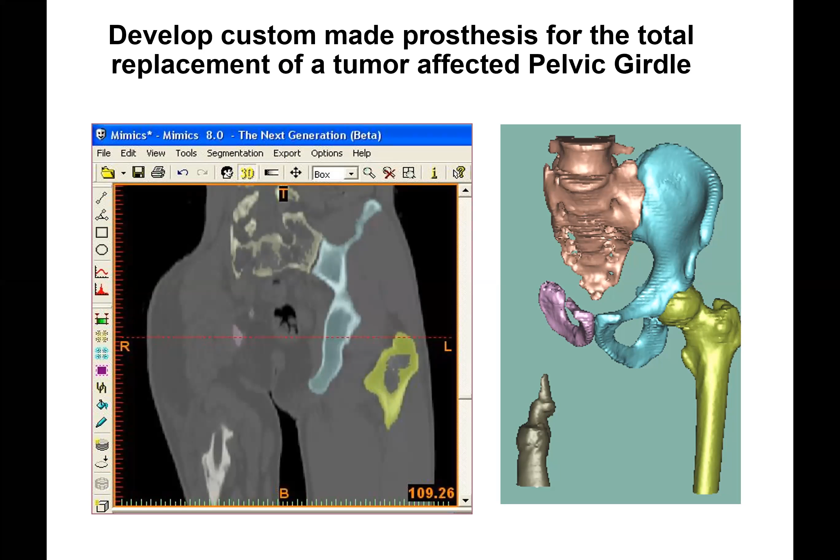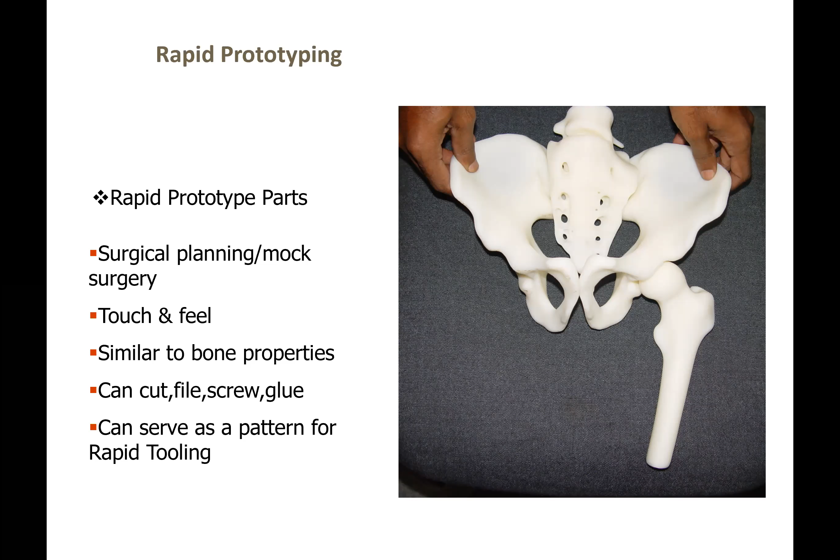The data was taken using CT imaging and digitally reconstructed into a CAD model. Having done the reconstruction, the entire digital replica was converted into a physical artifact, a 1:1 artifact, using fused deposition modeling out of ABS material. And you can clearly see the entire visualization is perfectly enabled because of the 3D printed parts which have captured the complete anatomy.

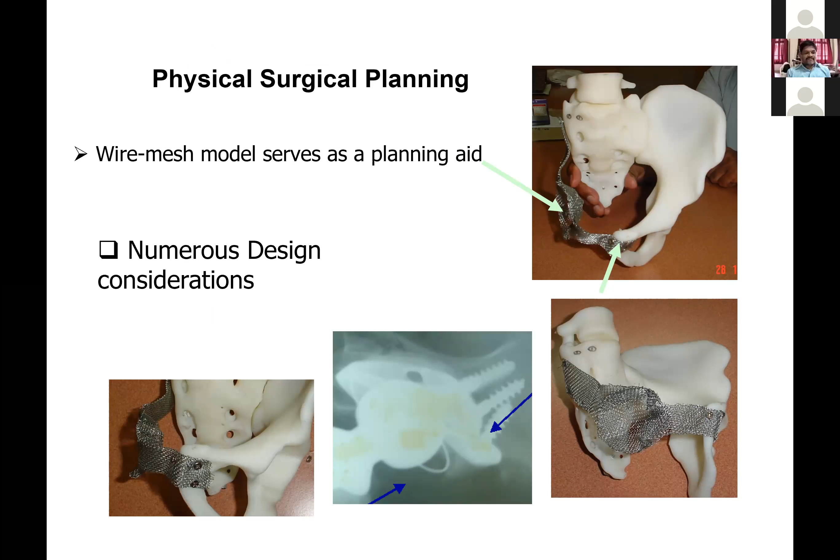And then we started doing the physical surgical planning with the help of customized implants. So you can see iteration one. In this case, the wire mesh that you see is a representation of the customized implant, the digital implant - I would like to call it concept one. Fundamentally, this concept is showcasing connectivity to the pelvic girdle on one side, and on the other side it is talking about placing this hip joint, including the acetabular cup.

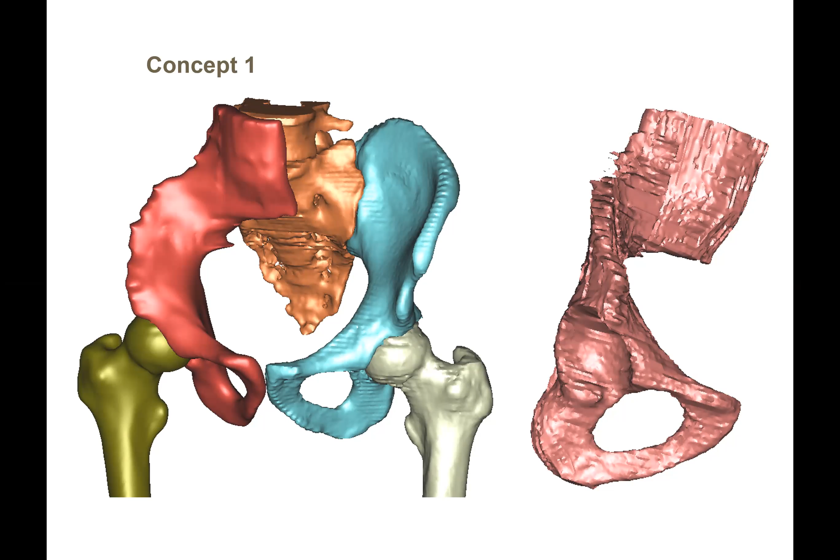You can see in this concept one, and concept two which is more refined, these concepts were tweaked and fine-tuned with the help of finite element analysis in terms of identifying the zones of stress concentration, finding out the locations of the fasteners, and then tweaking the distribution of mass in such a way that material is available only at the point of stress concentration and removed from other places.

Now, this particular practice is becoming very powerful in India now. There are at least 10 to 12 startups, including places like Maker Village in Kerala, Anatomiz3D in Mumbai, and many companies in Bangalore. Fundamentally, if you upload the data taken from scanning of some anatomy, you are able to get physical parts, including patient-specific surgical guides and implants, both from metallic materials as well as thermoplastic materials.

And the surgeons are able to do the necessary rehearsals on these anatomical replicas before getting into the real situations, which is improving, first, the efficiency of the surgery, and second, it is reducing the trauma for the patient. So this is a very important intervention, and I'm seeing in course of time there will be many sensors embedded into these practices, tactile sensors, and surgeons using them as good pedagogical tools in terms of improving the skills of medical students.

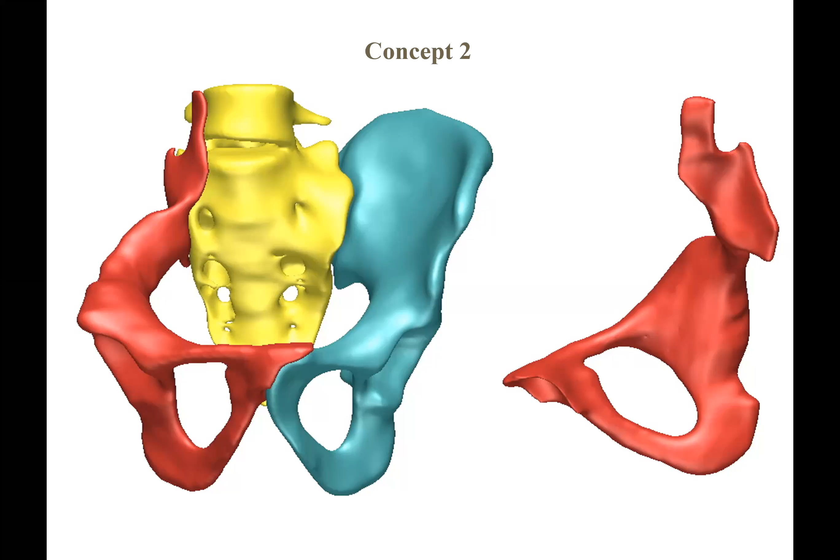So I have also taken this as a pedagogical model for improving the quality of thinking of the students. I've been a member of the academic committee subcommittee of the National Board of Accreditation for nearly 7 years now. I've really seen that when people talk about outcome-based education, fundamentally they connect it with NBA. But the important thing is, if you really look at Bloom's taxonomy, students typically try to remember whatever they have been taught.

In some cases, there is an effort to understand and apply, but when you want to improve the higher order skills connected with analysis, evaluating, and creating, the efforts by faculty members are not really significant in the classrooms. Most of the efforts are limited to only remembering and understanding. Sometimes it may go up to the level of applying.

So what I have seen is that technologies like IoT and 3D printing can be used in tandem in terms of translating the students' disposition towards the subject from applying to analysis, to evaluating and creating.

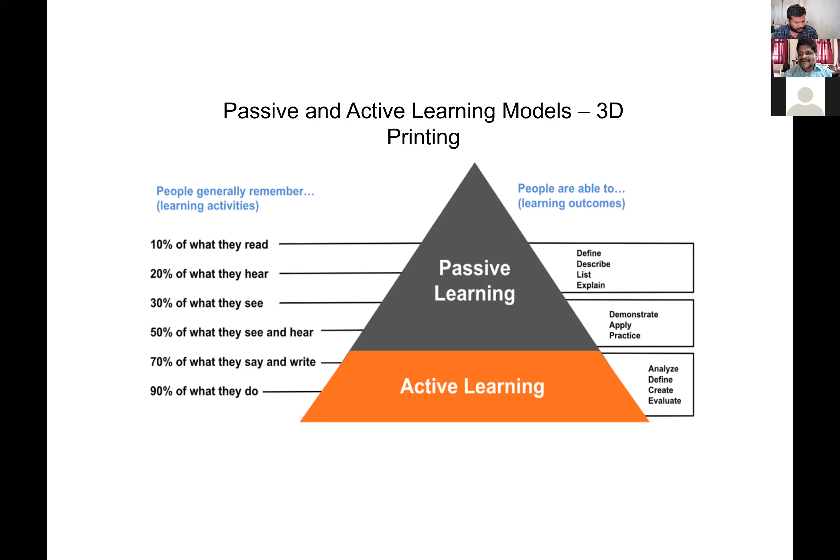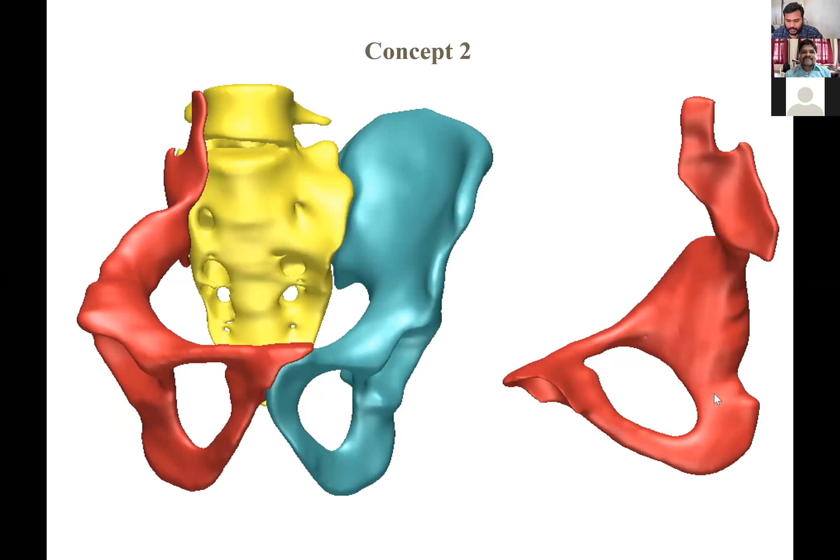Good afternoon all. I take this opportunity to thank Dr. U. Chandrasekhar sir for giving an informative session on industrial IoT and its applications, and sharing information regarding R&D and funding related topics in the industrial perspective. I also thank the participants for their cooperation and the smooth running of the program. Thank you all.